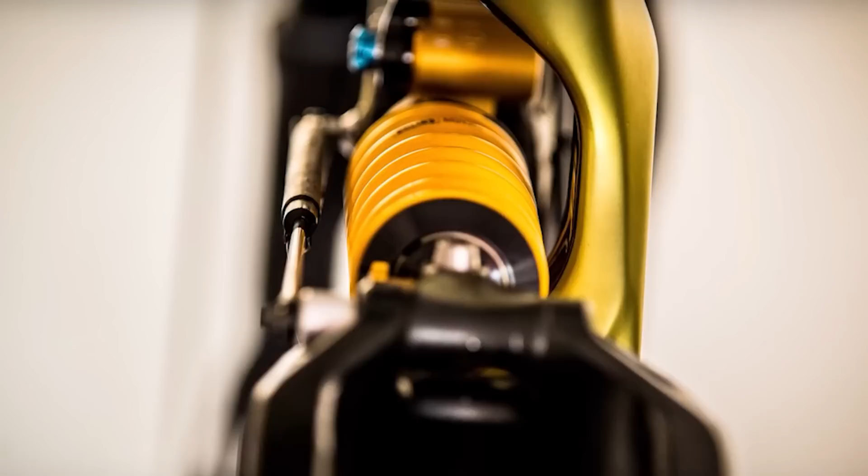Alright, bike nerds, we got a show for you. If you've been paying attention to the World Cup the last few seasons, it's tough to miss. All the black boxes, cables, circuitry, buttons, sensors, more cables, all attached to the bikes in the name of speed.

We're not actually sure what half this stuff does. I mean, is it telling Adam Brayton how far he's gassed to flat? Is it helping Loris Vergier figure out how tight his pants should be?

As the technology gets cheaper and more accessible, seems like we're seeing a new data acquisition system show up on bikes every weekend. And the more we talk to the riders, mechanics, and the engineers, it seems like the opinions about how you use this stuff are as varied as the systems themselves. How does it work? I mean, collecting data is easy, but the analysis and application, that's a whole other story.

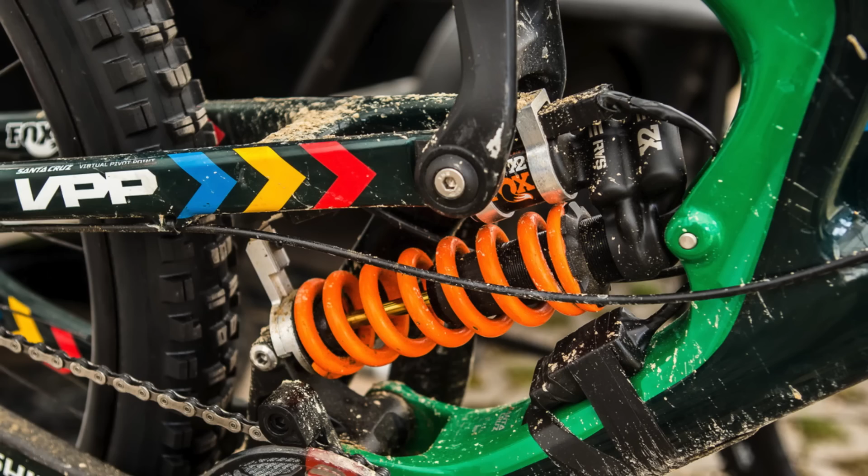Aside from top-tier World Cup racers and their mechanics, most of us have no experience using a proper data acquisition system, or even doing a proper suspension test. Have you ever wondered what goes on after all that stuff's collected, the numbers are crunched, and those colorful graphs are generated? You're in luck. Dave Garland called me to ask if I wanted to be the first person to put his Stendec system on a trail bike. Of course I jumped at the chance.

There it is, a brand new SB150, all kitted out with a Stendec data acquisition system. It's a pretty cool system. Starting at the top, it's got a custom on-off switch to start the data logging, and that connects directly to a 4K camera that plays in real time with the graphs, so you can know exactly where you were on track. It also allows Dave to work remotely if he can't be at the races.

The battery for the system tucks neatly into the head tube, and this little bolt on the side is for a custom insert that replaces your star nut, so you can still make all your necessary headset adjustments. Moving to the fork, that lower sensor is for axle movement, so that's going to track all the bump forces coming into the suspension. And that upper sensor is a rider input sensor. It can tell if your body weight or your braking forces are pushing the suspension down.

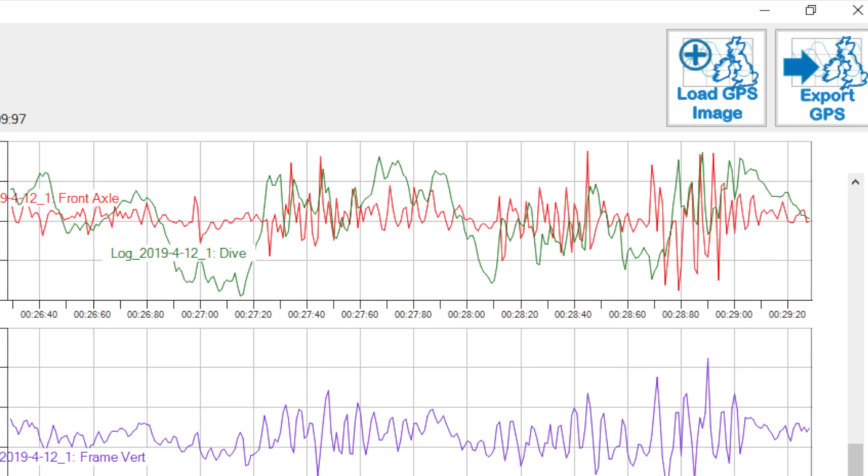Ideally, these two lines should be pretty well matched, and you can see from this graph of my own bike that we're experiencing excessive front fork dive under braking, as well as unnecessary suspension movement due to my shifts in body weight. We're going to tune that out, and we'll get to how we did it a little bit later.

On the front of the fork is a brake pressure sensor, and it knows how long and how hard you've been hitting the brakes. And since these systems talk to each other, it also knows if you're leaning over, so it'll tell you if you're braking into the corners.

Dragging your brakes in the corners is like listening to Nickelback. It might feel good on your own, but you're not going to brag about it to your friends. Don't worry guys, your secret's safe with us.

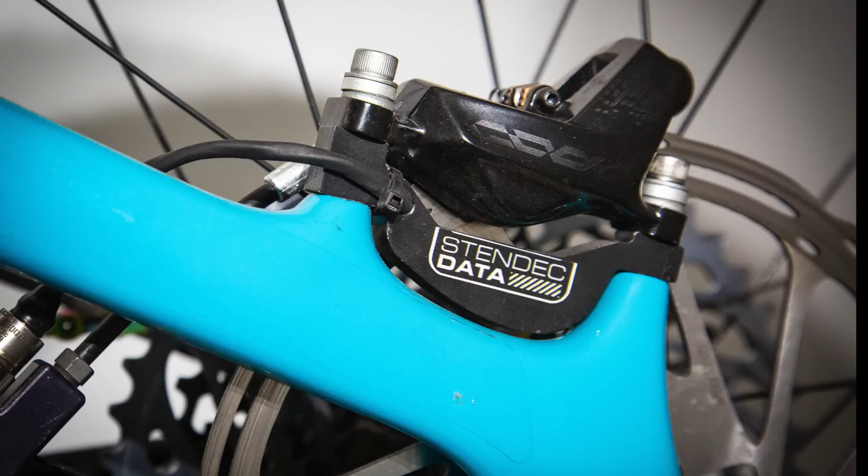In the center of the bike is the central logger. It also houses additional sensors that measure dive, chassis angle, corner arc, and lean angle. On the back, that's a custom-made brake mount, which internally houses sensors that measure wheel speed, wheel lockup, rear axle movement, and also some circuitry for the rear brake pressure sensor.

So with everything mounted up, it's time to hit the trails of my current hometown, the mountain bike mecca of Berlin, Germany. Yep, that's right, Berlin. And that's where we're going to be doing our suspension testing. This is Teufelsberg, a 300-foot tall man-made mountain of rubble from World War II. And while its height was once used to house an NSA spy station, it's currently home to a surprisingly good number of mini downhill tracks.

It's got a bit of everything. Corners, drops, fast rough sections, loose sections, off cambers, bermed corners, hucks to flat. All about a minute to a minute and a half long. With the sandy soil, when it dries out, it gets surprisingly slippery. We don't need a huge hill. We just need a familiar one. We're eliminating the variable of trying to learn a trail and get up to speed at the same time that we're making adjustments.

So usually when people think of data acquisition, they often associate it with just checking out how your suspension works. But we're going to be doing quite a bit more than that. This is more of a holistic approach to riding. What is it going to tell us or you about what I'm doing and what the bike's doing? It's really your interaction with the entire bike.

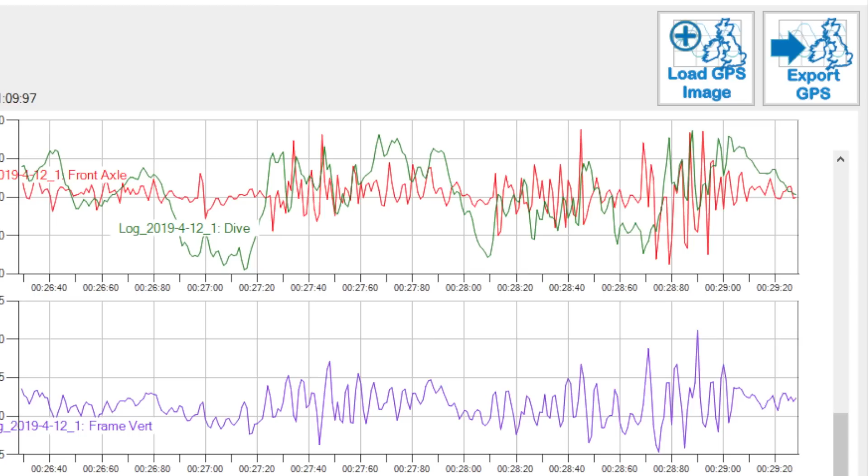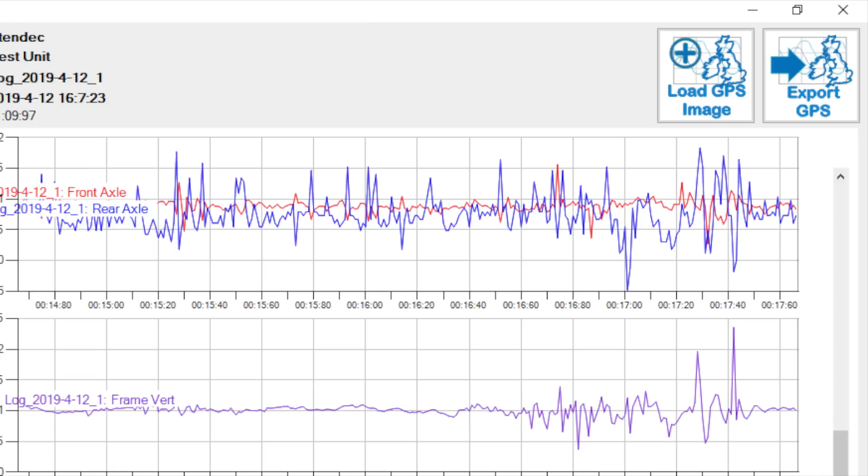Looking at the data from the two sensors on the fork, ideally, these two graphs should be pretty closely aligned. Instead, it's indicating a great deal of brake dive, as well as rider-induced compression. The picture doesn't get a whole lot better looking at the balance between the front and rear axles, with the rear shock using considerably more of its travel than the fork. We had some work to do.

At the rear shock, this meant lightening the high-speed rebound a touch to help the shock return from deep in its stroke just a little bit quicker, and also adding a couple of clicks of low-speed compression to see if we couldn't make it sit up just a tiny bit more. At the fork, we added 4 psi, bumping us up to 80, and added 4 clicks of low-speed compression.

So changes we made so far after looking at the data last night is we've added, I think, +4 more clicks of low-speed compression, so I think it's now +10. Yeah. And we've sped up the rebound. I've taken 4 clicks out, so I think it's now about +6 or 7. Yeah. And the damper is brand new. It's my second day on the Charger 2.1.

We're still running high speed fully open, but now we've got the low-speed compression 4 clicks in, where we'd started with everything fully open yesterday. So we need to begin to balance it out, your attack speed as you get quicker and quicker, because what we don't want is the fork to begin to sit up too much and not engage its travel to manage that bump force. All right. So we'll keep a check on that. So I should go bang out some more runs. Yeah, let's do it. Woohoo!

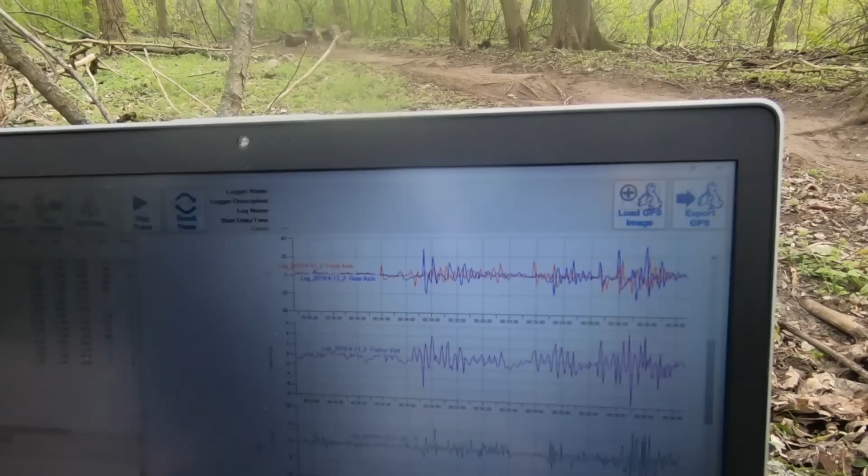At the top graph, we're looking at your front and rear axle travel. Yesterday, the blue line, which shows us our compression and rebound stroke on rear axle, was really tall, and the fork was really not engaging very much travel. Now, just with adding low speed compression on the fork and rear damper, we're beginning to get some stability. The front and the rear, as you can see on the graph, look more like each other, which is our goal.

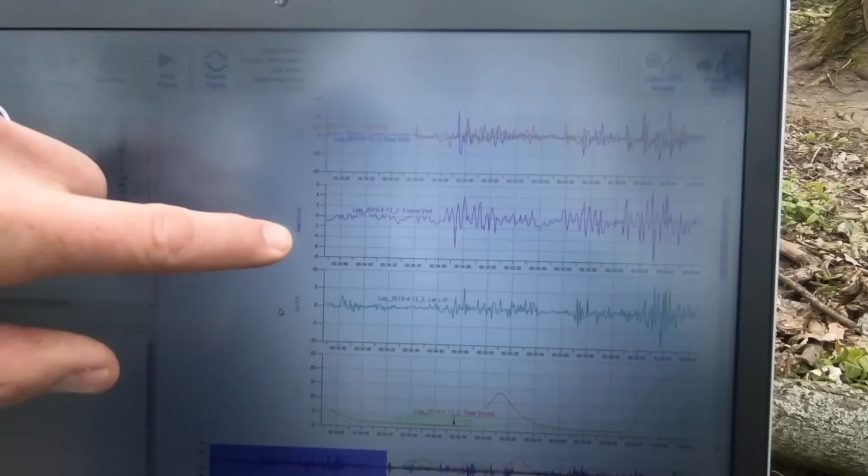We've still got a little bit of work to do on low speed compression on the rear damper before we begin to make any other adjustment. Your frame vertical movement, and you always have to look at the scales because the scales are different on each graph, is not bad. The main frame is beginning to isolate you from suspension movement, which is our end goal. We're just looking at one other parameter here, and that's Lee's input to the front end in relation to axle movement.

If those two mirror each other and they look almost the same, the input that you're putting into the front end is zero. They're equal. So you're not pushing through into the bike and creating movement independently of suspension movement. So if you look at the graph, front axle and rider input should look almost the same. And you've got some inputs here, if you see this turquoise line, where you're pushing in and making the front end dive a little, but generally the balance is pretty good all the way.

And that's one of the other key things that we're looking for, your input. The less input you create, the better stability you've got. So some of that rider generated input that I'm making, would that be sometimes pumping into the face of a jump? Yeah. So that wouldn't necessarily be all bad. No, because you still have to generate a certain amount of force to the ground yourself to give you independent amounts of grip. It's like isolated grip, your suspension can't do everything. So sometimes you have to join in to create some extra force to the ground.

But when I push down on it, there's times where I want it to push back a little bit, or I'm not going to get grip. I'm just going to push my handlebars into my suspension. Yeah. All right. So one more click of low speed in the back, and we're ready. Yeah, let's get back at it. Let's get another run in.

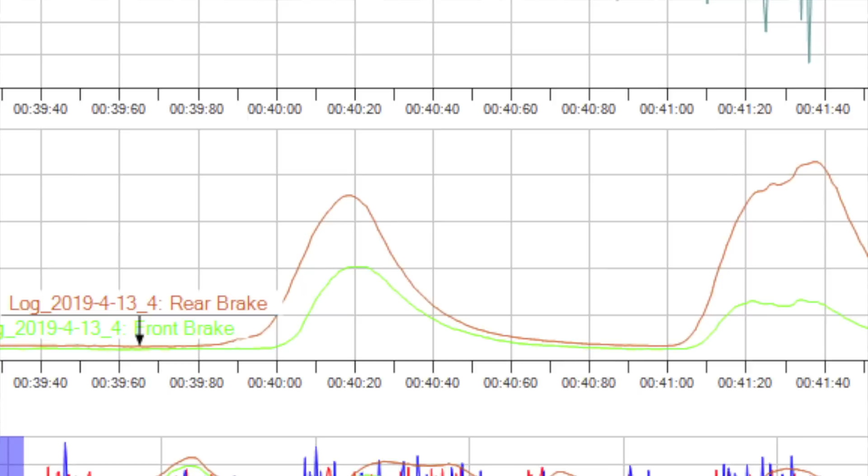All right, come clean, tell the truth. How was my braking? Today, pretty good. It was a stab. It was on, off, straight back to zero as soon as possible. The recovery of the bike going in and out of the corner is way better because it's in its best possible geometry for corner speed.

Case in point, we've come up to this section of drops right here that don't look so bad from this angle, but the corner is way down there. And all of your braking is done right here. You can come off this drop as fast as you want. The problem is you won't land in time before you hit that second drop, and there's not enough space to get your braking done. If you don't get it done there, you send yourself into the corner upright, and then you send yourself into both those trees.

Here's an example of line choice and suspension settings coming together. Some for the better and some for the worse. Everything starts out fine. I carry good speed across the off camber, get on the brakes hard and late, but you'll notice I'm offline. That slight miscalculation means instead of slowing down on dirt, I'm going to tag that rock, get bucked, ride a bit of a nose wheelie, and barely make the corner because my rear wheel wasn't on the ground at all to slow down.

Imagine doing that on my original settings with a fork that was diving, a rear that was squatted down that couldn't absorb the bump. I'm going to get kicked even higher. The brake force is going to send the front end down. I'm going to ride that nose wheelie even longer. Chances are I don't make that corner and I end up in the trees. That's the difference between losing 10 seconds in an enduro stage or just blowing a corner and cracking on with it.